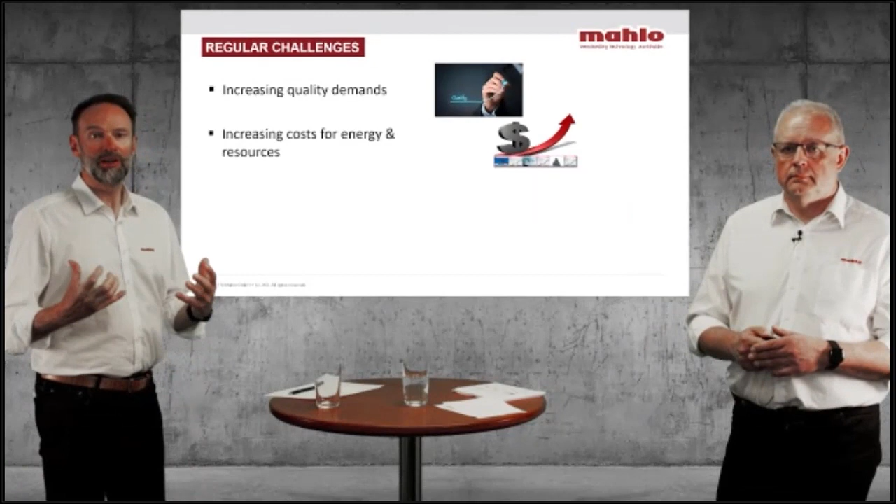Yeah, but no matter if we're talking about textiles or the other industries, we all have the same challenges, and this is quality. Quality is rising, money is always going down. We have to make the best out of it. We really have to get the best efficiency out of it. Nothing goes for free, but we have to provide the best quality.

These are the challenges you are faced with every day, because at the moment, after these unthinkable happenings in Ukraine, for example, and the energy crisis which we all face, also for the future, we are sure that the prices for energy and resources will only know one way, and this is upwards. This is also creating inflation everywhere. In most countries, because of the energy prices, you have a high inflation rate.

This means the salaries also have to go up in order to still be able to buy food and do the necessary things. And at the same time, because there has to be a transition in the world's energy sector and so on, everybody is talking at the moment about sustainability, and this is especially for textile companies an important factor which comes up more and more. Everybody wants to be green, very much so. It's not just that we see it everywhere. We are in the focus.

The textile industry is always in the focus of the media because of the pollution, because of the high energy consumption and so on. And this is also something we have to focus on ourselves, because we can save a lot of money, but also because we have a responsibility towards the next generation, and we have to take that seriously. And exactly this is what we want to discuss over the next 45 minutes to an hour with you. This is your path to sustainability, because we believe there is no excuse to waste any money. No.

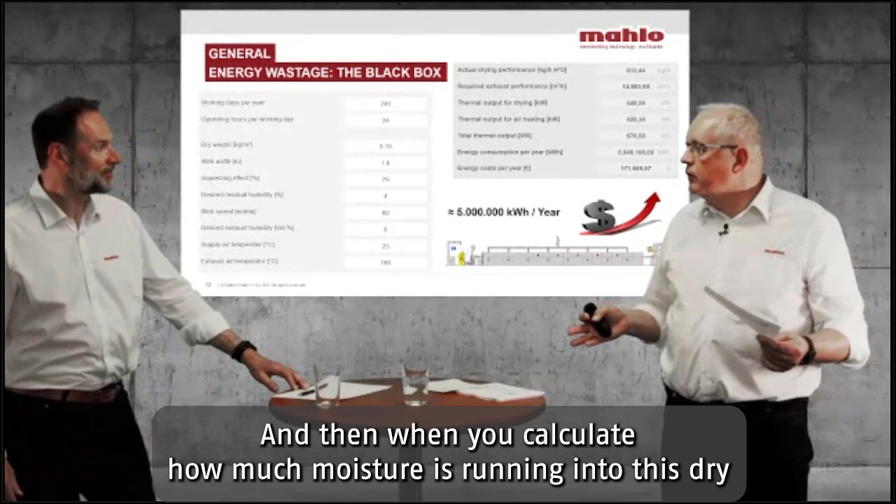When you calculate how much moisture is running into this dryer, you can easily calculate how much energy is necessary to evaporate all this water which this kind of fabric is bringing into the machine. Then we come to a conclusion that around 5 million kilowatt hours per year are used inside such a stenter. This will depend on the product mix and how it is operated, but this is a value which you have per year.

We did indicate the kilowatt hours here because it is very difficult at the moment - the energy prices, we know they go up, but they are still very different, and we think you will have your own values and can calculate by yourself how much money this is.

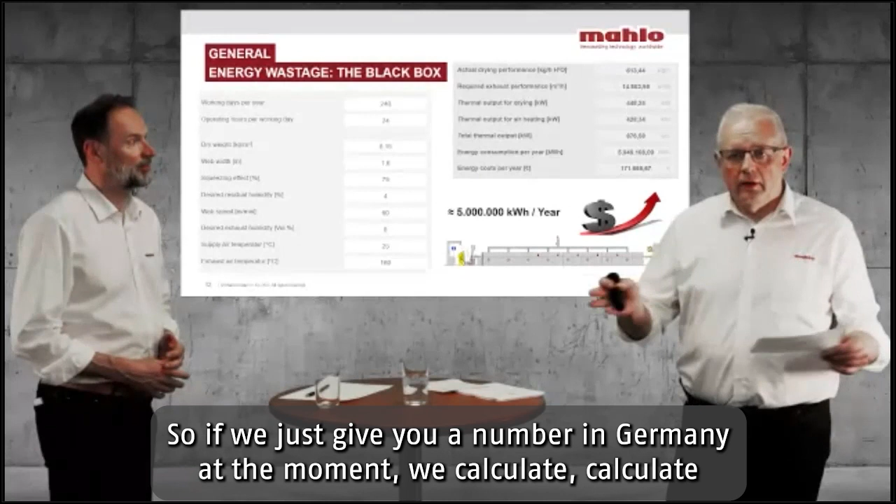If we just give you a number, in Germany at the moment we calculate with 9 cents per kilowatt hour for the industry. This will come to 450,000 euros per year. If you calculate over the next 15-20 years with a certain inflation rate and cost increase, then you can imagine how much energy such a stenter frame is actually requiring through the lifetime, and accordingly the savings you can achieve by optimizing those things are really immense.

And if you want to save money, you don't just look at the energy - there's also the time, the electricity, and that of course summarizes in saving the money. This is called the Mahlo process control.

But it's not just that we - yeah. Okay, sorry.

Since 1945, as we said before, we are actually measuring these processes at Mahlo. So this is something which is really in our DNA - something we have done ever since Mahlo has existed. And so we really have huge experience in this field.

Since we are quite often traveling and meeting our customers, going into the workshops, we are still surprised how few machines are equipped with this kind of sensors that can help you know what is actually going on in the machine and help you optimize the input of resources and energy in such a machine. This is also the reason why we are now talking with you about the process control.

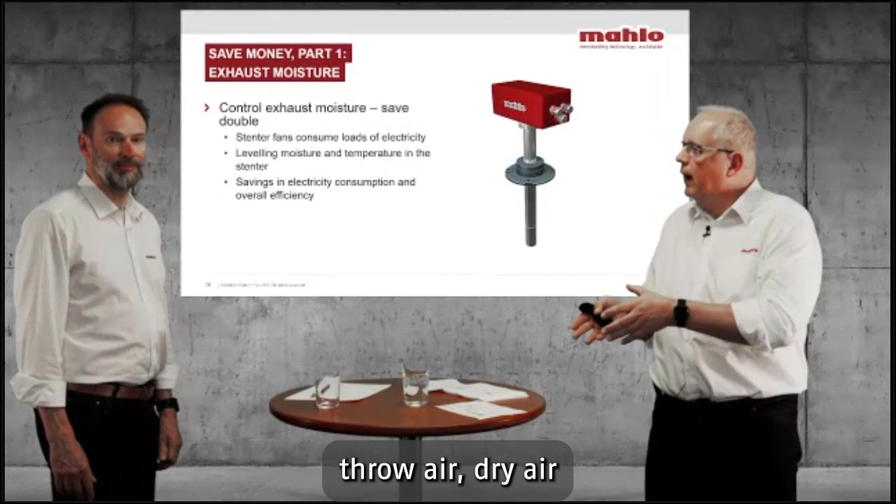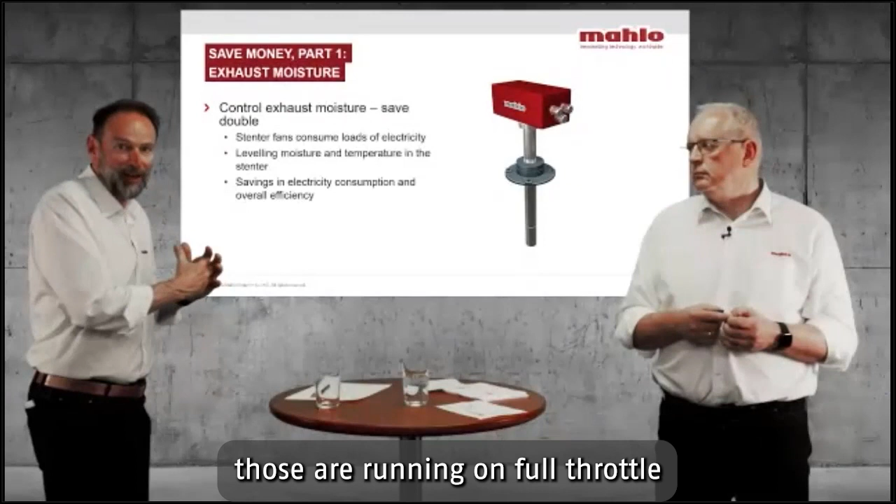Inside the stenter frame, you evaporate the water, and it has to be removed via the exhaust fan and exhaust duct. But very often, people throw dry air out of the dryer which could still carry much more moisture without influencing the drying process. This air is hot, full of energy, and that energy is better used inside than outside the stenter. By putting that air out, you're not just losing hot air that could be used inside, you're also running fans with 7.5 kilowatt motors on full throttle, wasting electricity while pushing out hot air you'd need inside. So you save twice if you optimize that process.

Therefore, we recommend putting the sensor that measures exhaust humidity into the exhaust duct. This is our ZS12, a zirconium oxide based sensor with which we can measure how much moisture is in the exhaust air. Once we know this, we can set a target value that's good for the drying process without influencing the drying itself. The system is then automatically capable of controlling the speed of the exhaust fan, so that only the amount of air actually necessary is thrown out via the exhaust duct.

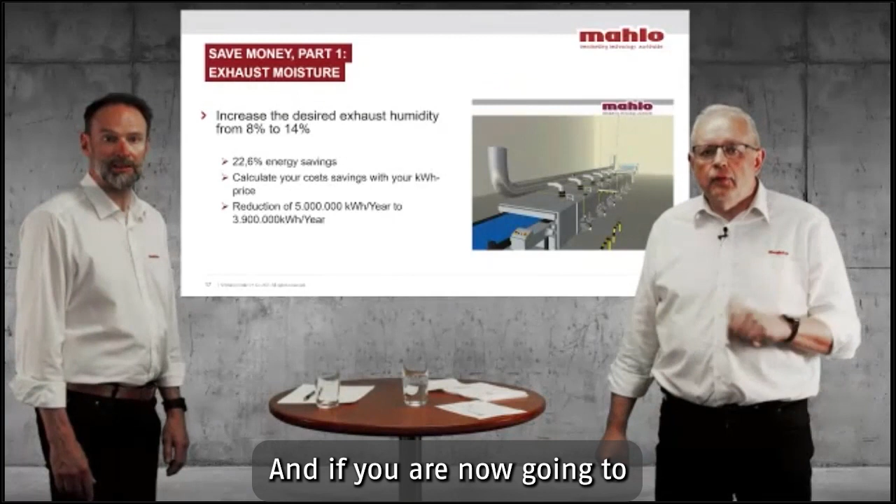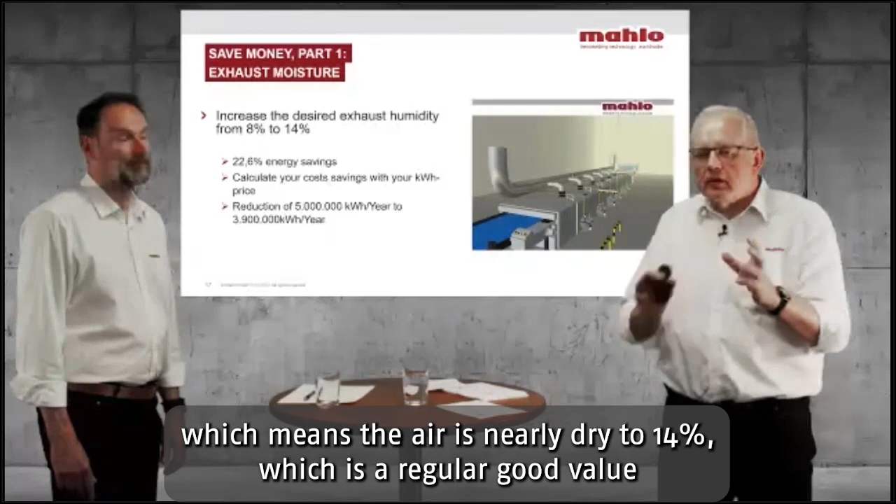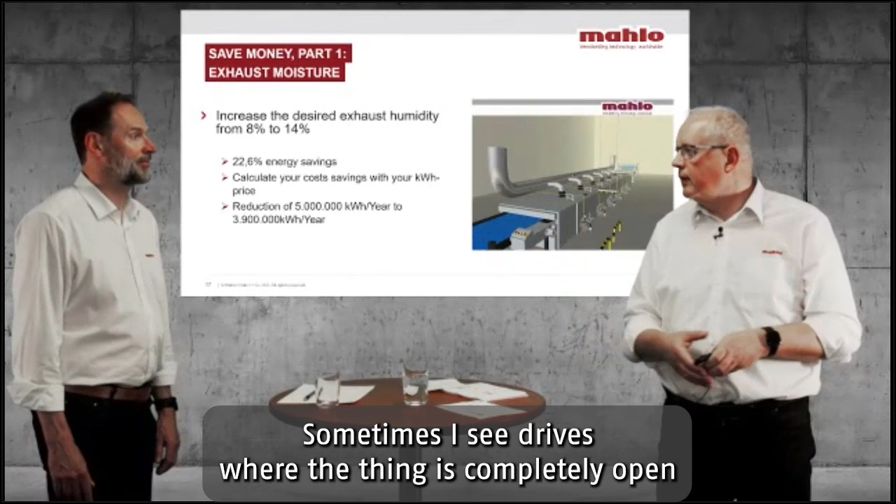If you increase the exhaust humidity setting, for example from 8%, where the air is nearly dry, to 14%, which is a regular good value for most dryers, you can save approximately 22% of energy. And 8% is still on the lower side—sometimes I see dryers where the exhaust is completely open and all the energy is leaving and going out.

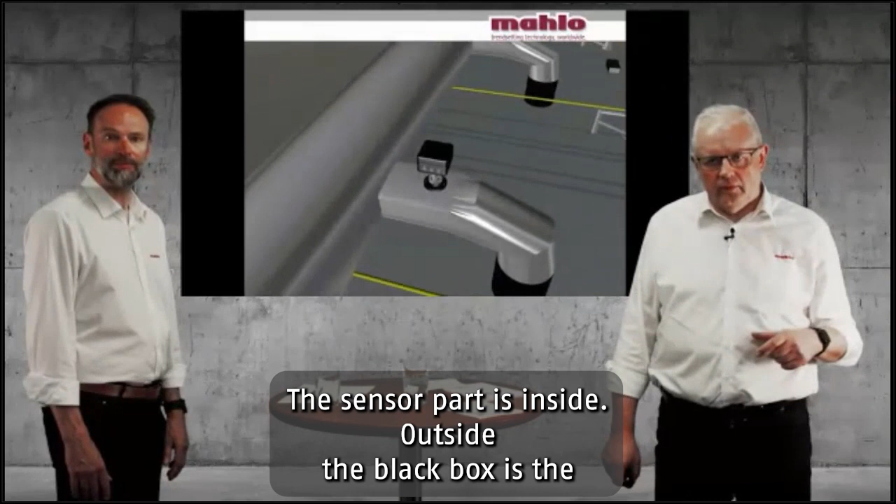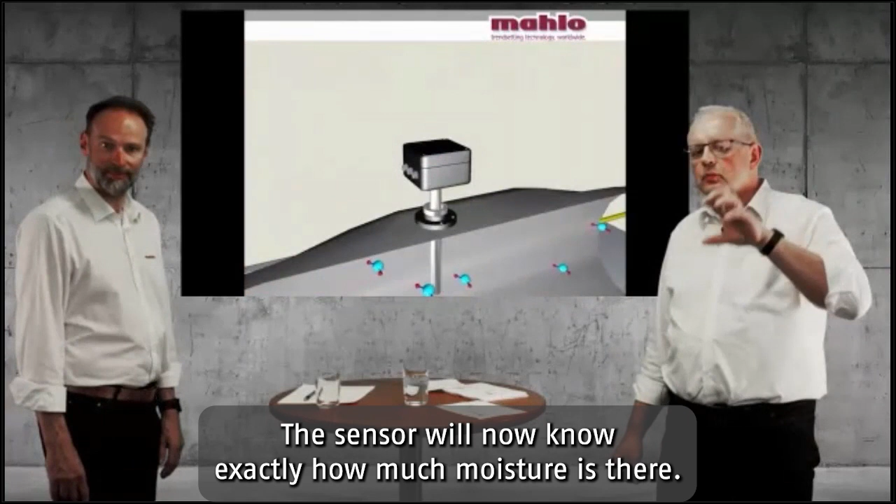Let's go inside the stenter and follow the path of what's happening. So you see the sensor now, it's in the exhaust duct, the sensor part is inside, and outside the black box is the electronics. Here you can see the sensor again. Now that it has stopped rotating, we can see the moisture going into the exhaust duct as it passes by the sensor. The sensor will now know exactly how much moisture is there, and this will be indicated. As mentioned before, with this information we control the exhaust fan.

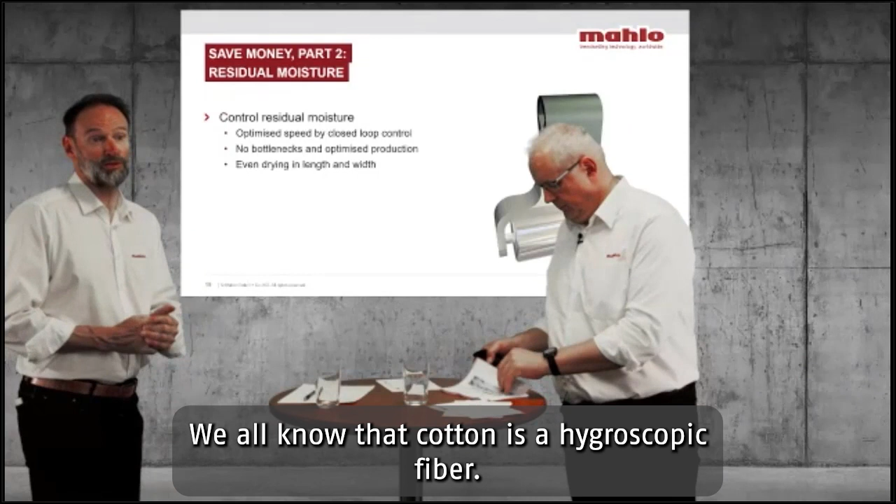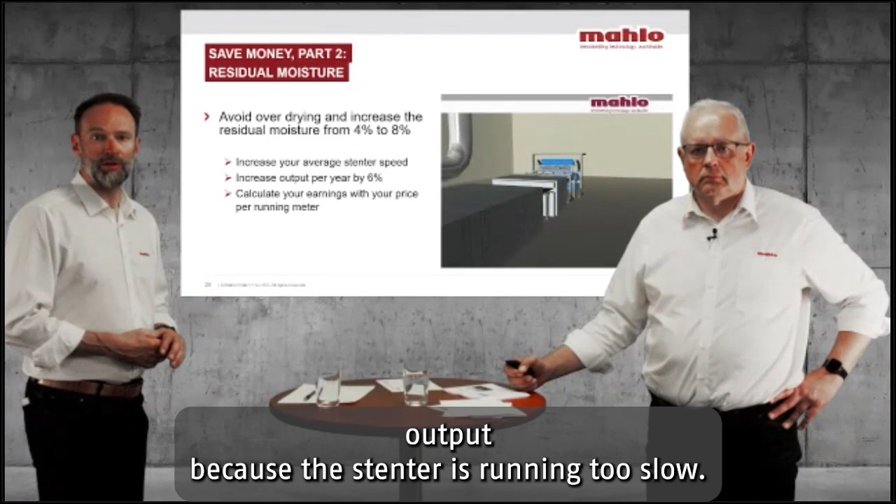Something everybody knows, I think this is also where Mr. Mahlo started, is the residual moisture. We all know that cotton is a hygroscopic fiber. Hygroscopic means it pulls moisture from the surface into the fiber, which means if you over dry a fabric, after a couple of hours you'll have back moisture of more or less 8% in the cotton fiber. With that being said, over drying doesn't help anything—it just wastes a lot of energy and really ruins your overall output, because the stenter runs too slow, you waste too much energy, and the fabric gets back the moisture anyway.

So you have to avoid over drying just to increase the speed of your stenter and get more production out of it. By doing so, you not only get better and higher production, you also get much better absorbency and better fabric quality at the end of the day.

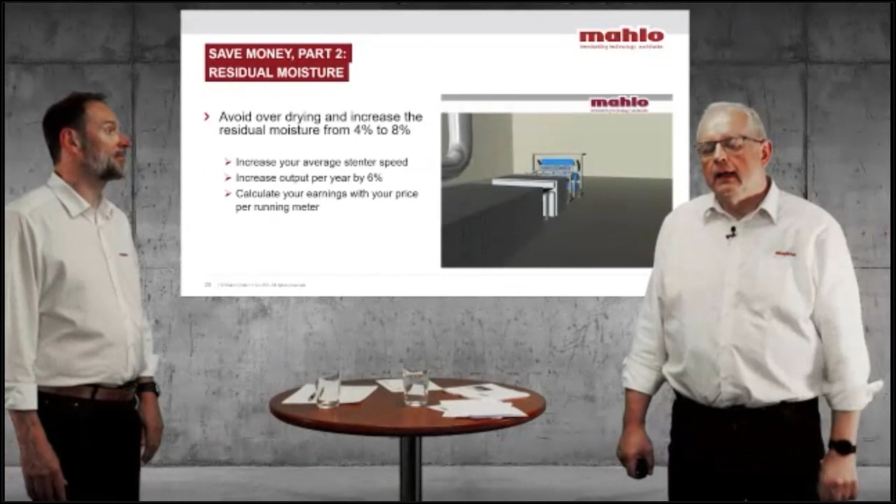Because you can get more output from the stenter frame, you reduce the bottleneck in your production, since you can run the stenter frame at the highest possible efficiency, and you have, as Stefan said, a very even moisture content at the outlet, which is good for the following processes.

We also have a short movie here where you can see the electrodes and how they are installed.

Most of you have seen this, because this is not only on stenters, you also find it on cylinder dryers and weaving preparation machines, wherever moisture content or residual moisture content needs to be measured. This can help optimize the process there.

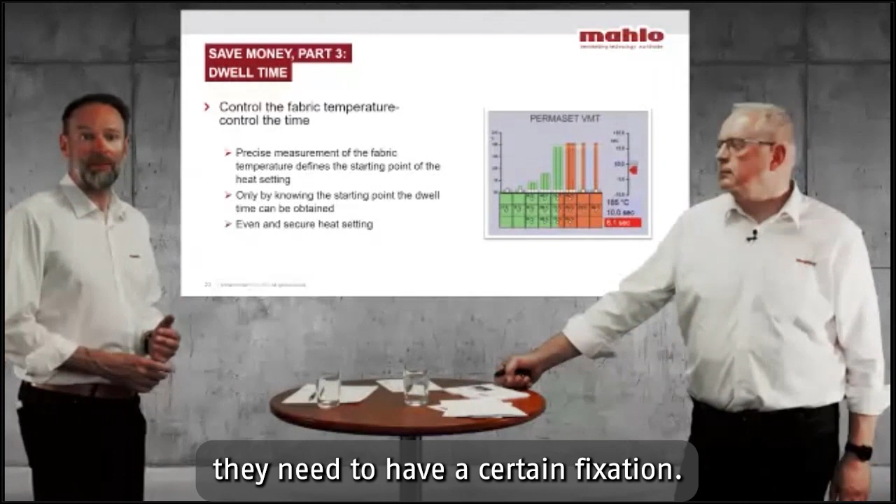Now let's come to part number 3, and this is the dwell time. If we talk about man-made fibers, they need a certain fixation, and this fixation is a clearly defined time period at a clearly defined temperature level. For having a certain time in the stenter, you absolutely have to know where it starts. Otherwise you cannot say when it stops.

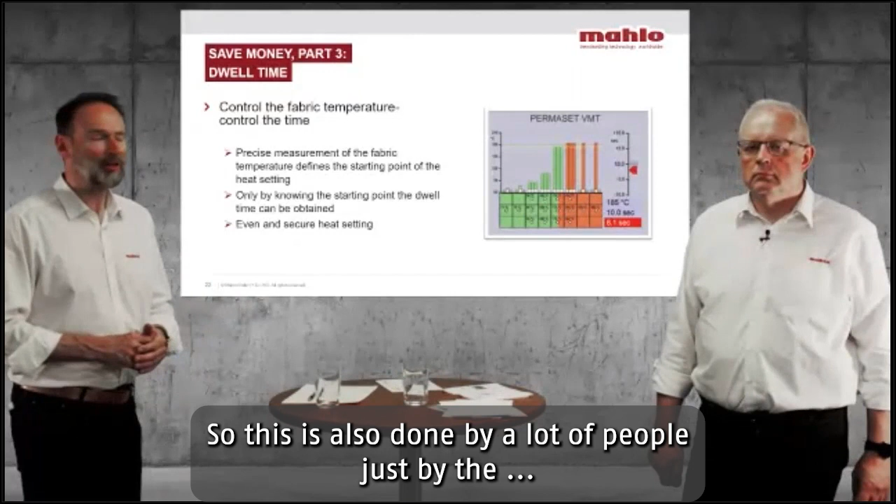So this is often done by people just out of habit, because you do it all the time. Very often I go to customers and ask, and they tell me, well, we run this at 25 meters because we always run it with 25 meters.

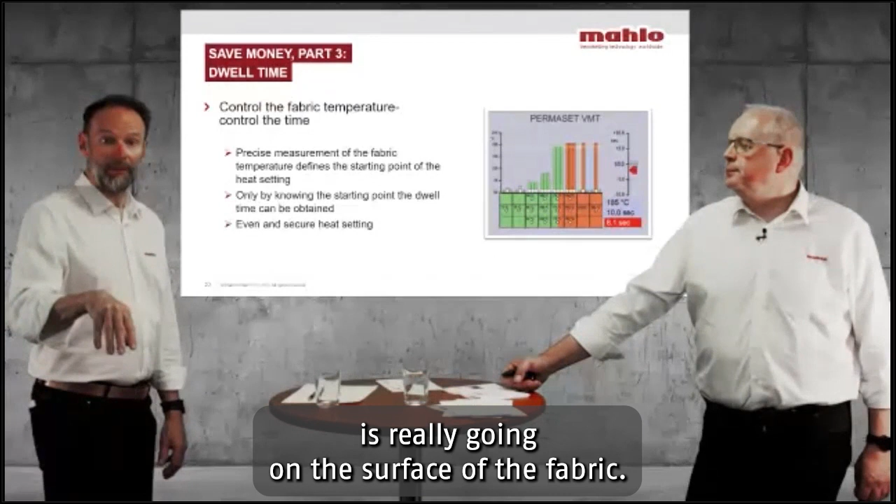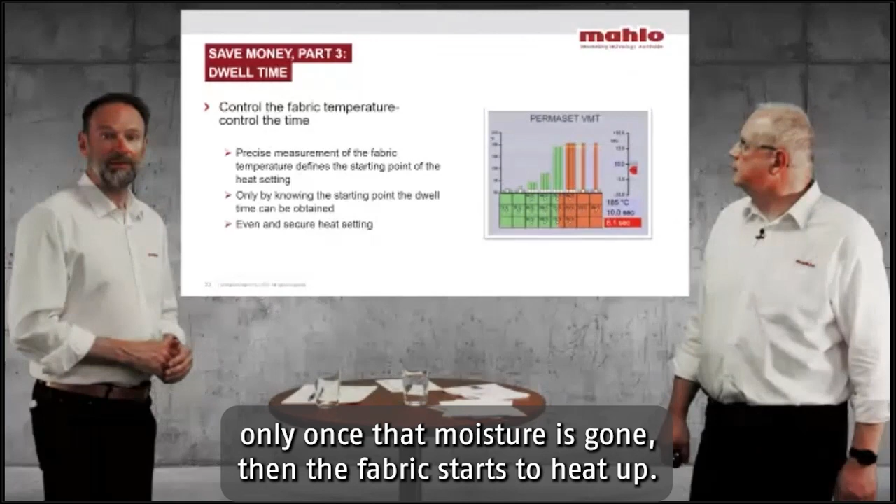Here we have a sensor which measures the temperature of the surface of the fabric. It is not measuring the temperature of the chamber, it is really going on the surface of the fabric and measuring that temperature, simply because at the beginning, when you evaporate the water out of the fabric, that energy is used to get out the moisture, not to heat up the fabric. Only once that moisture is gone does the fabric start to heat up. This is how you see it on the red columns, and those red columns indicate the point when the heat setting temperature is reached.

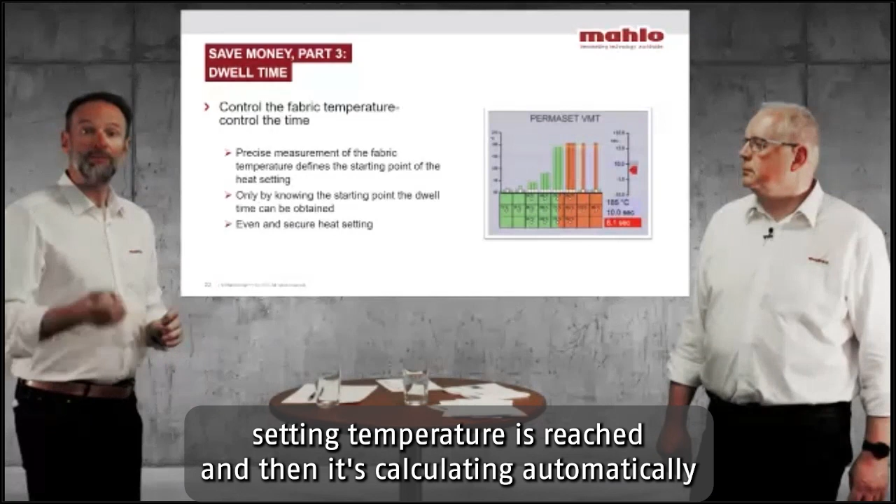And then it calculates automatically the time until the heat setting is finished. So you always have exactly the right speed for that process. Again, you optimize the speed of your stenter and the production of your entire wet finishing. You just have to enter the desired dwell time, which you will for sure know, and off you go.

Then that's the full control done, and with this you can avoid any safety margins. A lot of people run their stenter frame with high safety margins. They do not run it as fast as possible because they want to be on the safe side. But being on the safe side sometimes is also not very good for the touch, for the handle of the material.

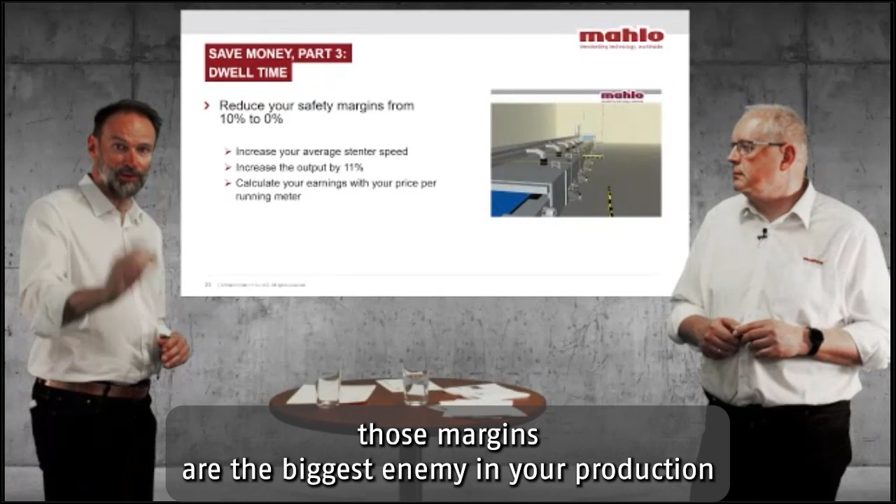Let me tell you something about safety margins in general. Those safety margins are the biggest enemy in your production, simply because they have such a friendly touch. You think, okay, I'm running a little too slow, so nobody's going to blame me. But those safety margins are stealing so much money, so much production out of your process without you even knowing it.

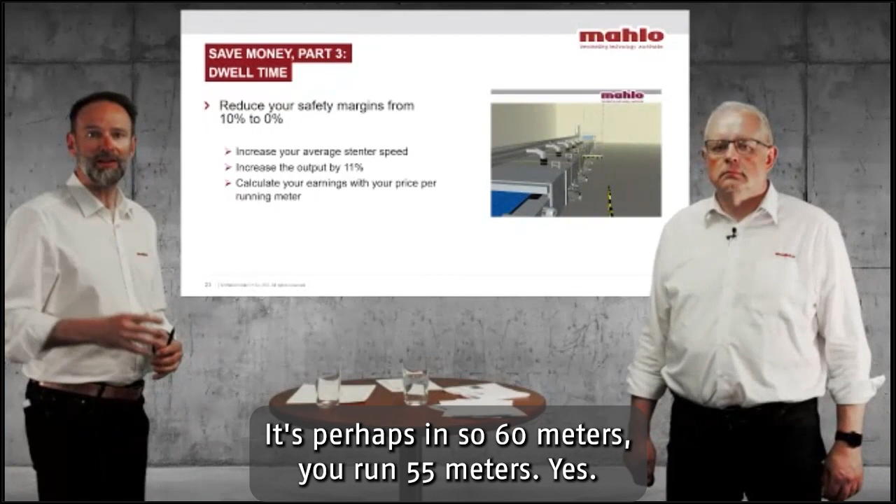With that safety margin, it's not much - perhaps instead of 60 meters, you run 55 meters a minute. But that's 10% less production that you are getting out of the entire wet finishing. And this, gentlemen and ladies, is a huge number, really something you cannot leave unconsidered.

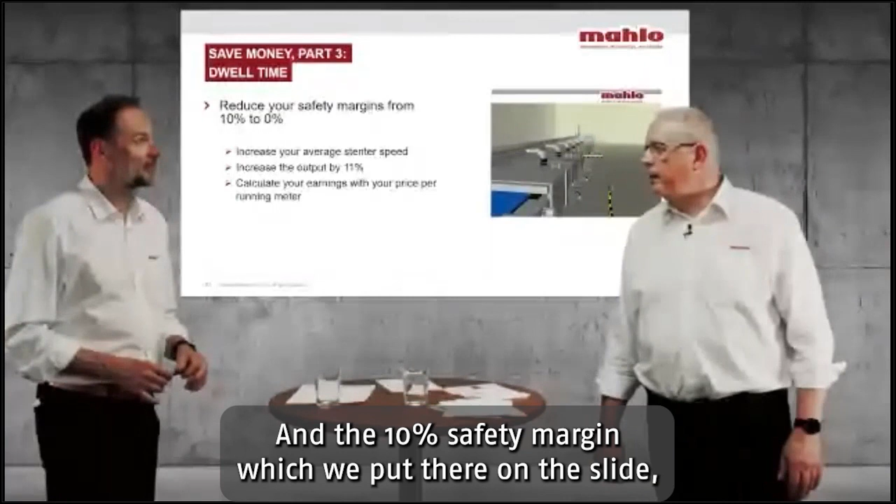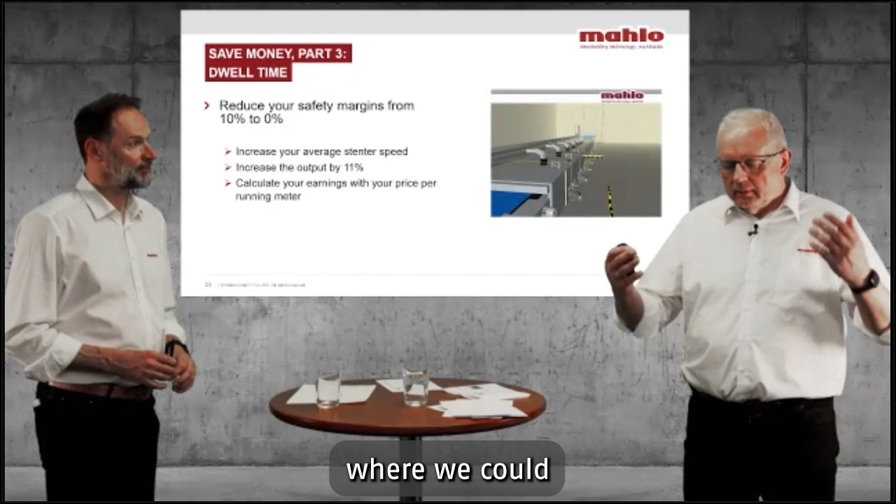And the 10% safety margin we put on the slide is really on the low end. I have seen much more possibilities where we could increase speeds by about 20 to 25%. This is possible, and then you get a quite good output. This, when you have a higher output, also has a very good effect on the energy cost per running meter.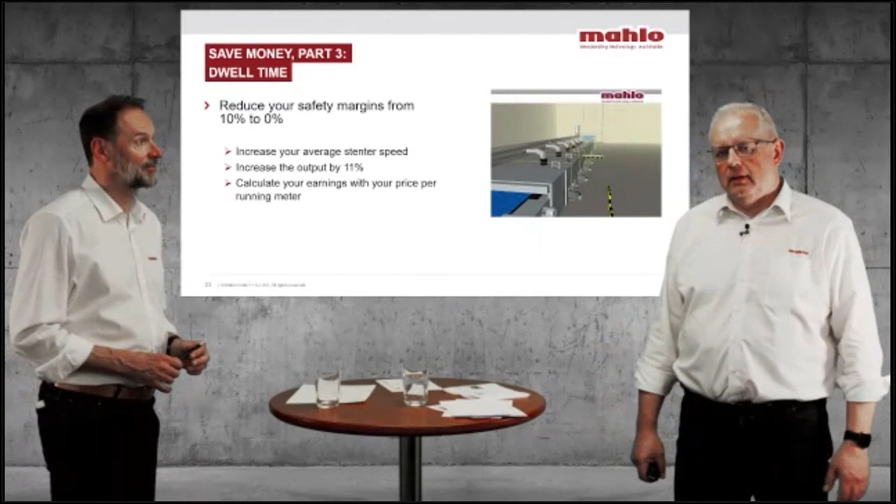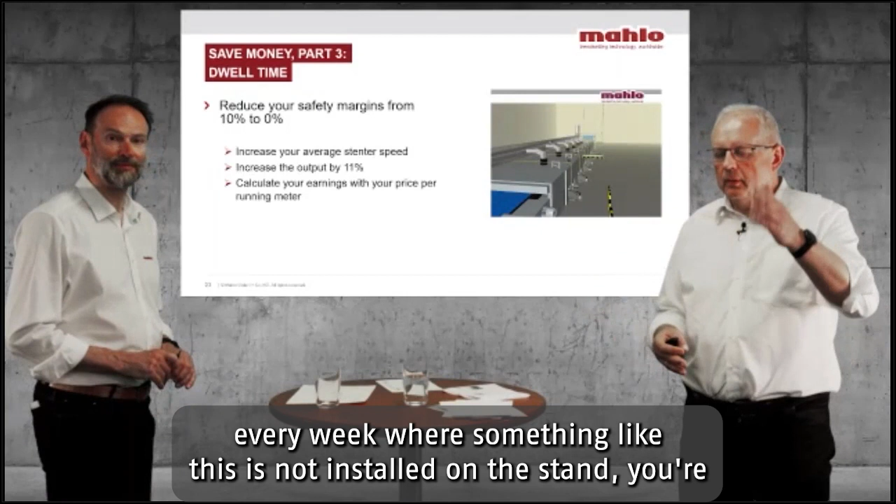In the end, as we said before, there is no excuse not to do this, because wherever heat setting is going on, you need to do it in the end. I don't understand people sometimes when they say let's wait, because there are some costs involved to install such a system - because every week where something like this is not installed on the stenter, you're losing money.

Let's go into the popcorn mode once again for the next movie. Here we see again the inside of the stenter, and you see where the sensors are pointing onto the fabric, giving information to the speed sensor of the stenter, which will always run in a way that your dwell time, your heat setting time, is reached. Here you see it exactly with that small diagram we showed before, where you have exactly the right time when the heat setting process is starting.

That's now the next point. Let's interrupt quickly - we've talked about energy savings now for a long time.

I would be very curious about the situation in your production. Do you have anybody who is responsible for energy saving, something like an energy saving officer, an ESO, in your company? Do you know something like that? So please give us a yes or a no.

Yeah, we just started this inquiry. So, very simple question: do you have such an energy saving officer, yes or no?

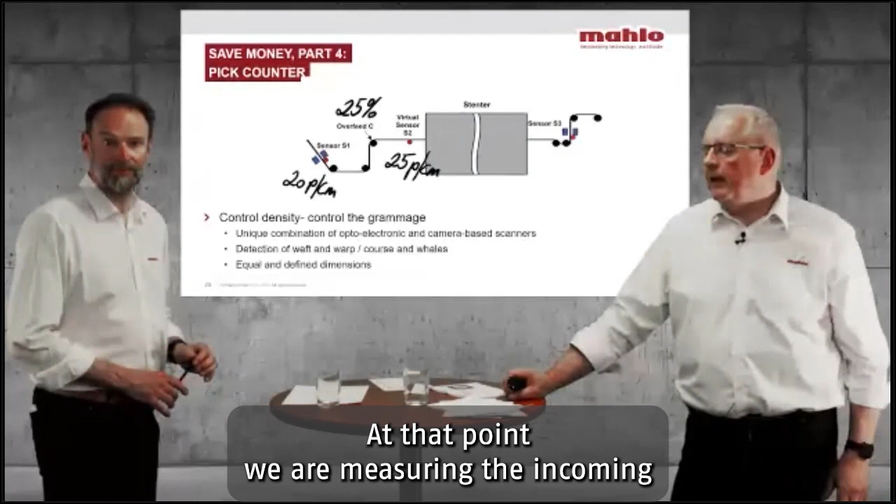And how do we now overcome this? We overcome this with our sensor. This is an optical sensor which is installed at the entrance before the overfeed roller. At that point, we measure the incoming linear density, meaning the courses per inch or the picks per centimeter.

Then, in this case, we have an overfeed of about 25%. You go onto the stenter frame at the stenter entrance, you overstretch the fabric and overfeed the material with 25%, and then you can reach 25 picks per centimeter, or better expressed in courses per inch. Normally this all runs quite fine if we assume that the initial linear density is always staying the same. But exactly,

this is what you mentioned before - it is not always the same. Sometimes we have an entanglement, sometimes a different machine which is stretching a little bit more, and then instead of 20, you all of a sudden have just 18.

And when you now measure with our sensor at the entrance of the stenter frame 18 picks. Let's say it develops, or there's a piece and the next piece comes with 18 courses per inch, and you run the stenter frame constantly with 25% overfeed, then you can calculate by yourself. You will not end up with 25 picks or courses per inch, what you want, but you end up with 22.5 courses per inch.

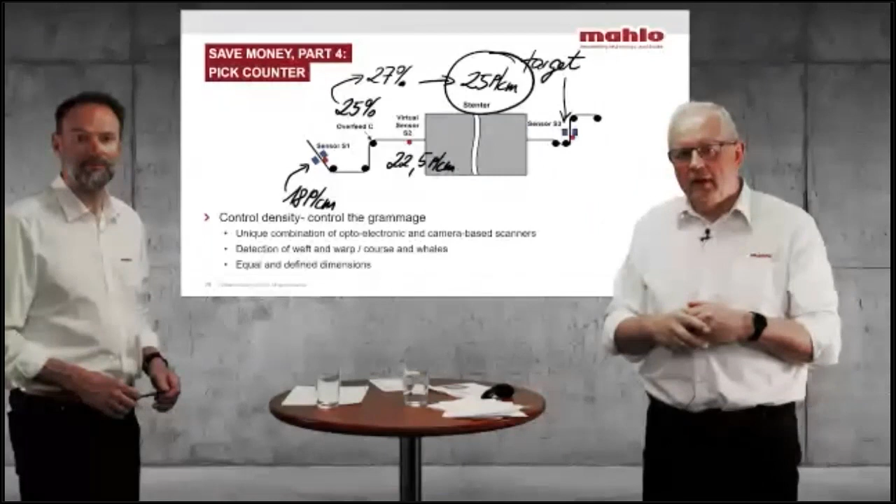And this is exactly then our task, because we will then send out controls to the overfeeding system of the stenter frame and increase the overfeed to 27% until we have again these 25 courses per inch or picks per centimeter. And with this kind of control, this intelligent feed-forward control, we have then the possibility already at the entrance of the stenter frame to ensure that what goes into the stenter frame is completely equal.

So long story cut short, if you have a pick counter from Mahlo, you really have peace of mind that you always have the right density of your fabric, no matter what happened with it before. And this helps inside the dryer again when you have a heat setting and you have a material coming in with a constant density, constant weight. You will not have to do a lot of control up and down.

The same for the residual moisture. It helps for the residual moisture. Even for the exhaust humidity control, you will have a more stable output and also drying process inside the stenter frame. And therefore, we put this pick counter also in there because from our point of view, it's very important, especially when we talk about sustainability and saving costs. We believe that this is a big possibility.

And I have to say, over the last 10 years, we have sold more than 1,800 of those systems to the industry, and most of them were retrofitted also. But this is not the only advantage that you have with such a tool. Density and weight, they are going side by side, and we all know that knitted goods are sold by weight. So the weight plays a major role, and we have now the ability with our camera-based sensors at the exit to also get an indication about the weight directly after the stenter without putting the samples to the lab.

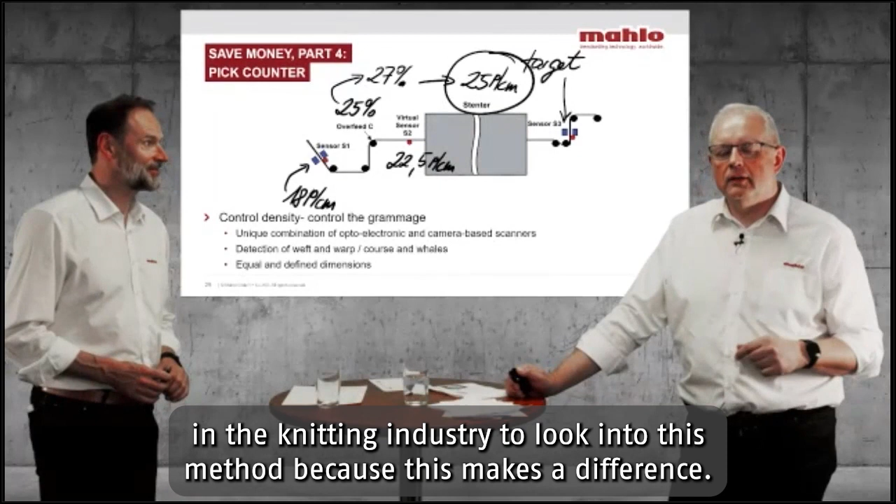Okay, so this is what we can provide as well. This is part of this pick counter package on top of it. Now I only can recommend all the companies today online who are active in the knitting industry to look into this method, because this makes a difference. It really does. Okay. So coming to another one, cylinder dryer.

Whenever you see cylinder dryers, you see a lot of steam, and if you have a stack of cylinders where there's no steam coming out, then you know exactly there's a problem. The cylinder dryers are mainly designed according to the potential of the continuous line, and continuous lines are designed according to one speed only, because the time for the washing and bleaching and so on is defined on the different compartments, and therefore also the cylinder dryers are defined for the highest weight and the highest speed, so they cannot be controlled in many ways.

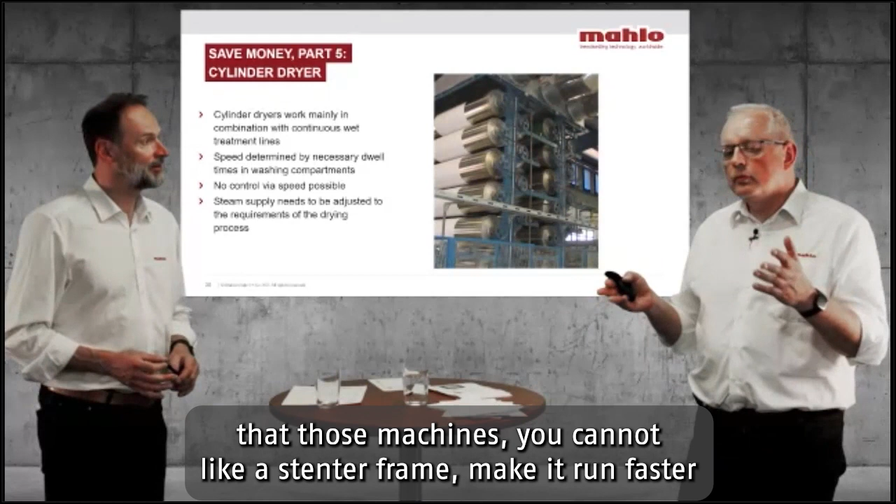So it's very important to know that those machines you cannot, like a stenter frame, make run faster or slower in order to control the residual moisture content with it. The only choice you have here is to control the input of steam into the cylinders of the dryer, in particular if you have a very, very light fabric which is running over the entire stacks. And this is what we do. We have the ability to switch on and switch off different stacks or even different cylinders to optimize the steam consumption for two reasons.

First of all, steam consumption, of course, again, is energy. It's money. But on the other side, and this is even more important, you have a good absorbency afterwards, because if you have a fluctuation in the drying process, then of course you have a difference in the absorbency. If you just imagine you have an over-dried fabric at one stage with perhaps 2% or 4% residual moisture, and then again you have 8%, that is already a delta of 50%. In the next process, where you perhaps have chemicals added, a lot of chemicals are used at that step just because you had a problem with the cylinder dryer.

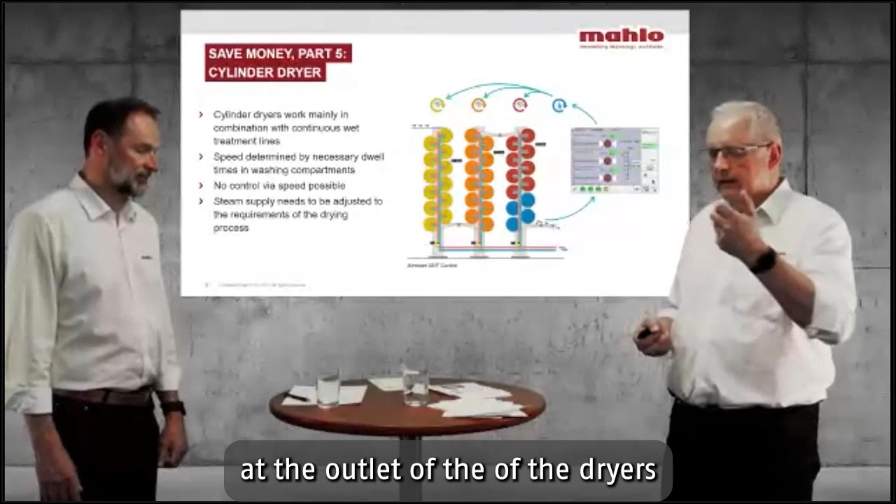And now a few words about our system. How does it control the steam supply into the individual cylinders? At first, we need to know how much energy is required. How can we get this information? We have decided that we are measuring the temperature of the condensate at the outlet of the dryers, because with the condensate temperature, you know exactly whether there is steam input required or whether there is enough steam still inside the material.

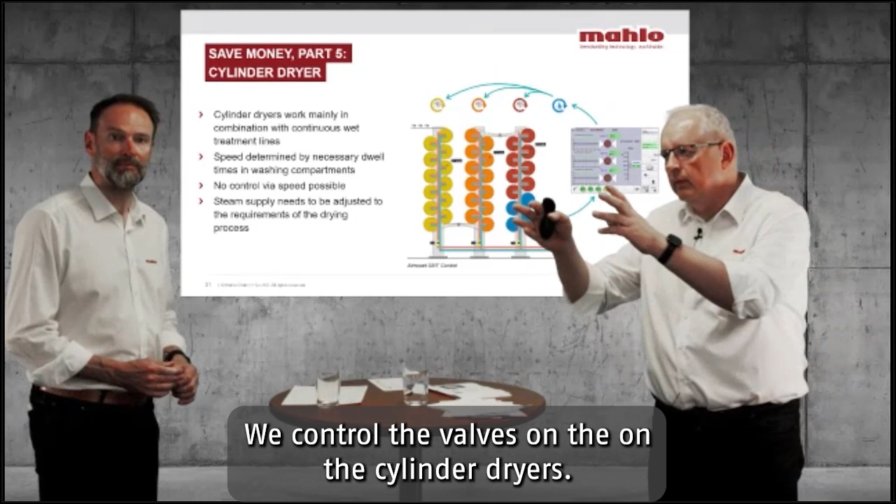So if, for example, you're running a lighter weight fabric and a heavier weight fabric comes onto the first stack, immediately you will see that the condensate temperature will drop down. And this is then the moment where we control the proportional valves on the cylinder dryers, and with this we keep the condensate temperature always stable.

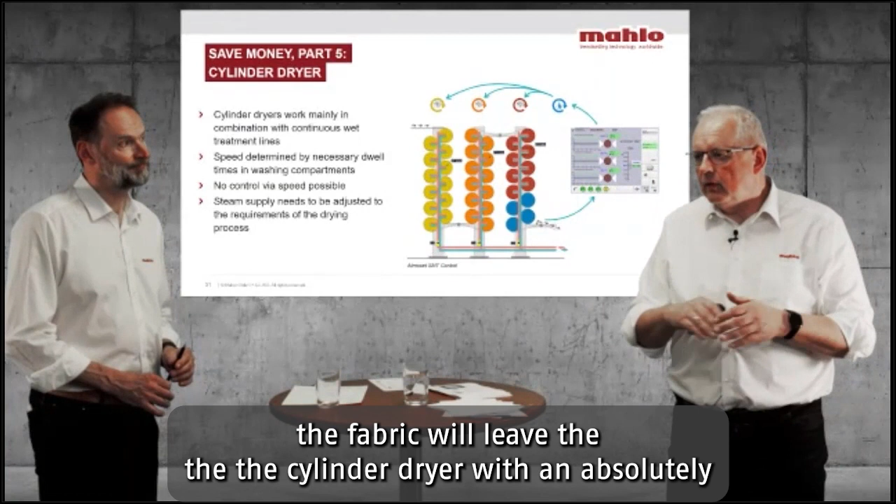At the end of the dryer, we additionally have a residual moisture sensor, and with this moisture sensor we will bring the absolute flat line to the right level, whether we require 6%, 8%, or 10%, depending on the fiber type and the process afterwards. With this kind of system, we can ensure that, like what Stefan said before, the fabric will leave the cylinder dryer with an absolutely homogeneous moisture content in length direction.

So listing and tailing in following dyeing processes will be much reduced, and this is also what a lot of our customers told us. Energy saving is very interesting for them, but also the improved quality within the following processes. Every padding coming afterwards is consuming so much more chemicals and dye stuff if you don't have a level and optimized residual moisture at the cylinder dryers, and this is costing much more money than the steam, because this is highly concentrated chemicals.

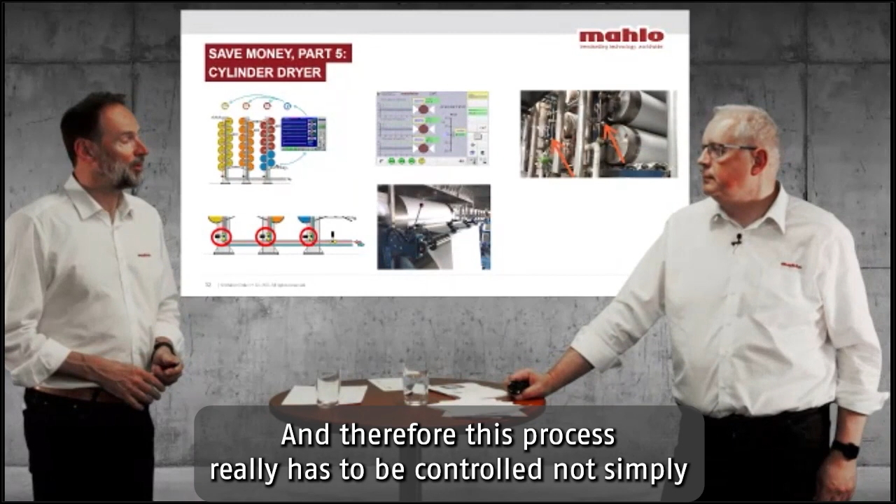This is really dye stuff which costs a lot of money, and therefore this process really has to be controlled, not simply because of the steam. We are talking about 36% which can be saved here, but the following costs really count, and that also has to be looked after.

Here you have a few impressions of how the systems look when they are installed. Because of time reasons, I don't think we have to go through all this. And here is a summary of what we already mentioned. One important thing is this one value, up to 36% savings of steam input, or energy savings.

And these are values which are not from us. These are values from our customers who noted and stored the data about the steam input into the system before and after the installation. It depends always a little bit on the product mix how much you can save, but it was up to 36% on several qualities. They have a calculation before Atmoset and after Atmoset, and after Atmoset is normally 36% less steam than before. The other points on this slide, I think we have mentioned already when we explained the system.

Let's jump into the main part. So we can now start with the residual distortions and weft straightening itself. We have put this also into the context of energy savings, because the cheapest energy is the energy which is not used in the end. And weft straightening is one of those topics.

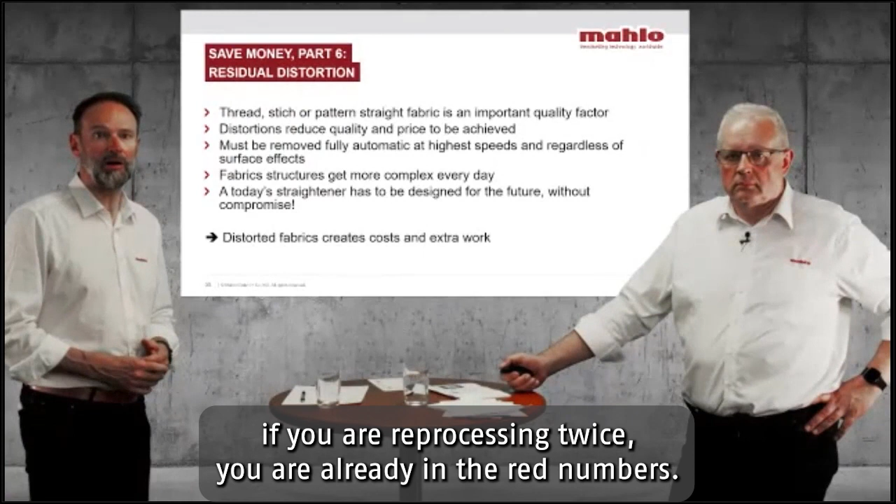You need to supply straight fabric to your buyers. If you can't do it, and you recognize that there are still distortions in, you will have to go back, and this is creating a lot of costs. If you reprocess once, the entire margin is lost already for that batch. If you are reprocessing twice, you are already in the red numbers. So from the economical point of view, this is a very important factor, that you don't have to cross a stenter twice.

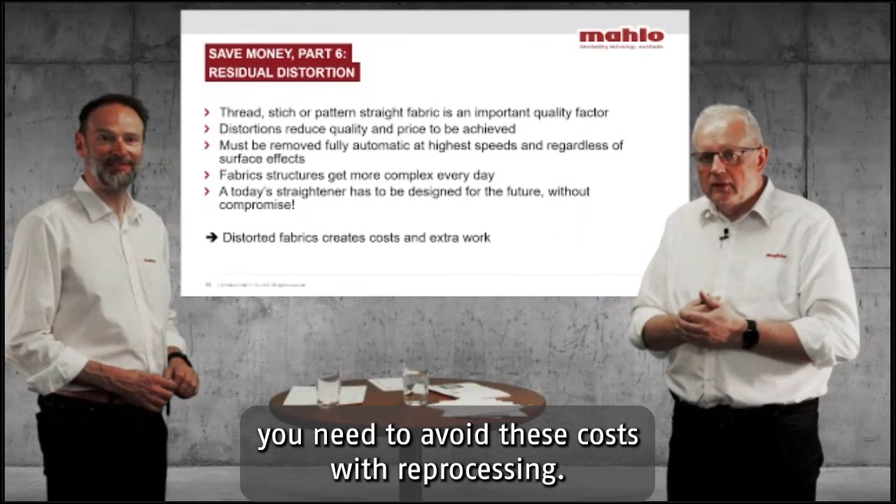Exactly. And when we talk about weft straightening machines, we believe that a weft straightener does not have to be designed only for the products you have at the moment, because we are in a fashion business. Therefore a weft straightener has to be designed for the future, so that you are safe, because in the future you also need to avoid these costs of reprocessing. We talked with our customers and asked, what are they doing when they have this kind of problem, when they realize some distortions?

Some of them, and this is the majority, say they will run it a second time through the stenter frame, and there they have to dip it. They have to wet it to get it corrected, and then they go through the stenter frame. It's a waste of money.

Another possibility would be to accept a lower price for quite a big portion of the material, say a B quality, or, as we have mentioned, a total loss. This is where you really cut out those areas where you have these distortions, and in the end, this is where the costs are coming from, from all this reprocessing.

One of the big advantages of Mahlo is that we have a very, very wide range of different units. So we can adapt our model totally according to your needs. And this starts with the sensors. You tell us your product mix. This is something we always need to talk about with our clients. We need to understand what they want to do with such a machine.

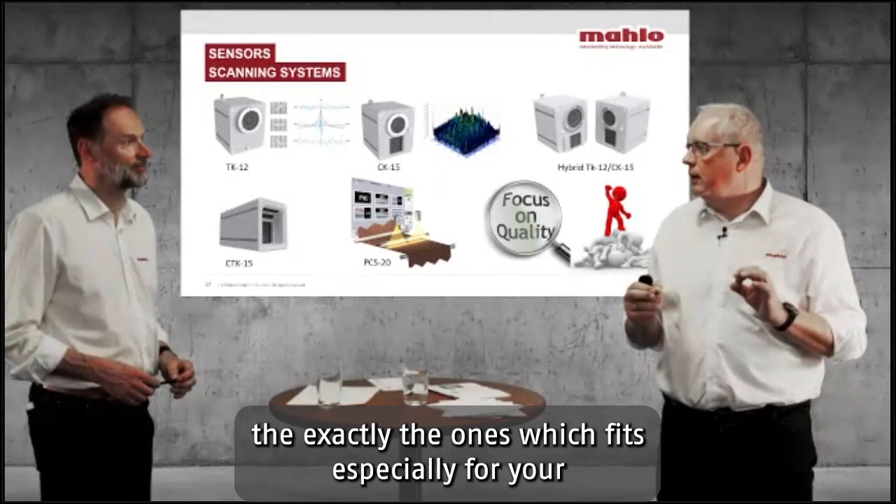And after we understand this, and after we know the product mix and your plans for the future, then we can use our quite big portfolio of different measurement principles to select exactly the ones which fit your needs. We do not have to do everything with a camera. We do not have to do everything with an optoelectronic scanner. We have quite a wide range.

And what we see here, on the left side we have the TK12. This is our optoelectronic sensor, which we consider to be the standard in straightening for the majority of the products. Then we have our CK15. It's a camera-based image scanner, which is available with reflected light, with transmitted light, with enforced light for special qualities.

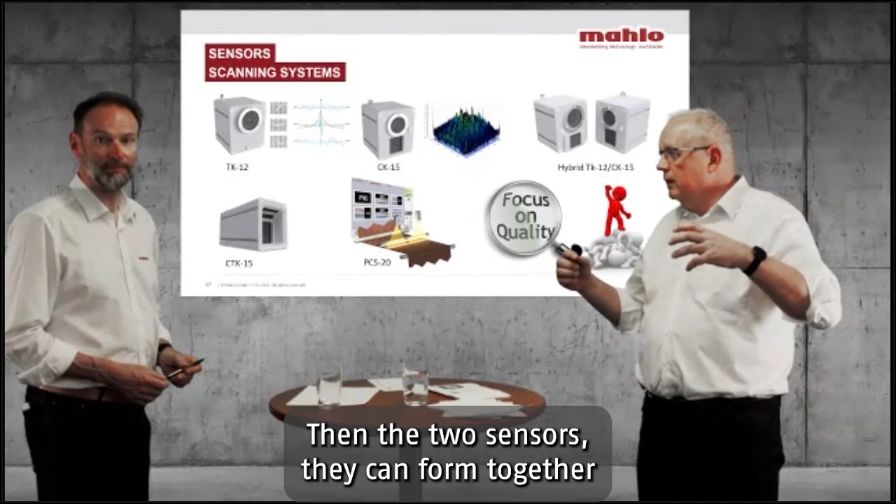Then the two sensors can form together a completely new system, which we call a hybrid system. And then you can use one sensor to check the fabric from one side, and from the other side you can check the others. And with this, you have in the end all possibilities.

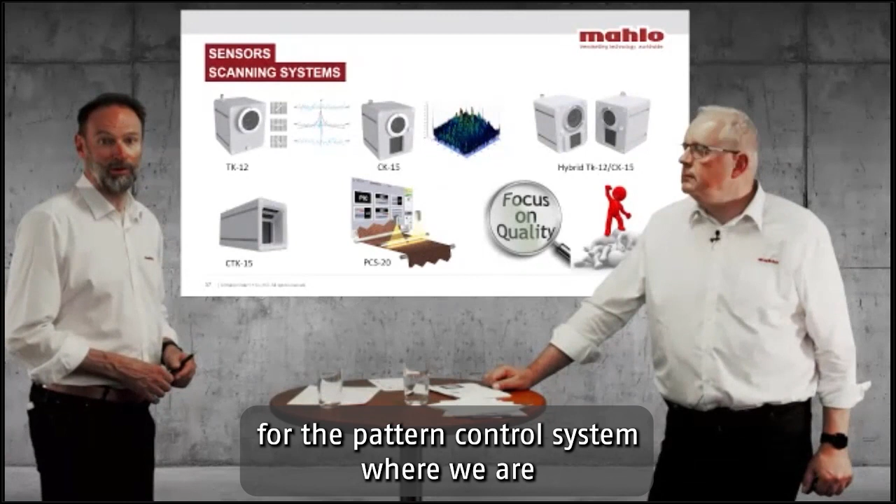Finally, we also have the line scanning for the pattern control system, where we are scanning the surface of the fabric like on a Xerox to detect the patterns. So if not the weft is running the show, but the pattern is ruling, then this PCS line scan camera is the best solution for that. A typical application would be, for example, lace fabric, where you do not have a weft or a course line going from one side to the other. You also use it in shoe production or for airbags in technical textiles. So there are a lot of different things that can be counted.

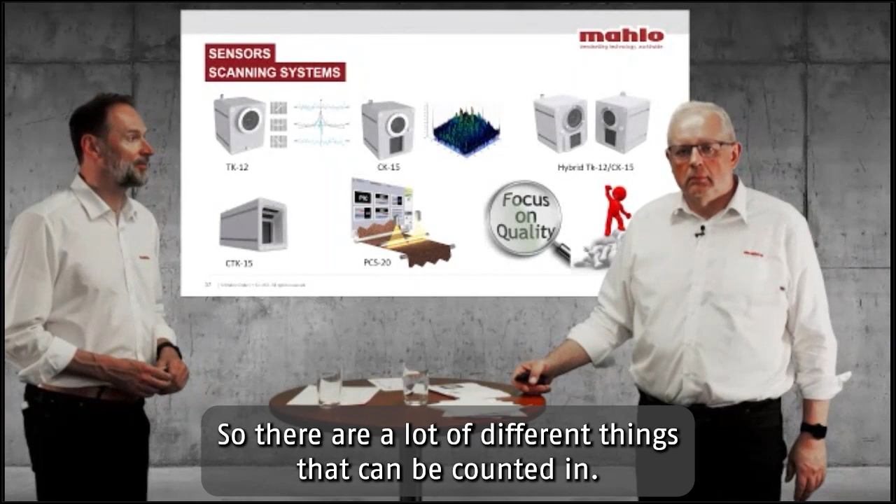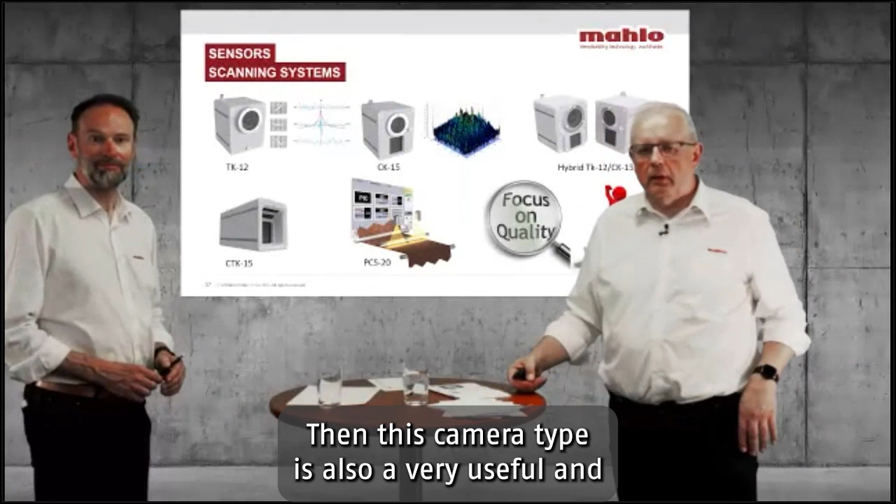And we have one more sensor. This is the CTK15, and this is for when we have very rough structures, like in the carpet industry, tufted or woven carpets, or slow speeds, or very slow speeds. Then this camera type is also very useful. And like we mentioned before, it's not only that we have these different principles, also within each principle we have different executions of our sensors with which we can adapt directly to your needs.

Should we run a little bit, because I think there are still a lot of different things ahead of us. Now this we can maybe skip.

What is also quite important is to understand that we have a very, very unfriendly situation at the dye houses. We have a lot of dust, a lot of dirt, a lot of fluff. So it's a very hostile situation, and therefore any traversing movement of the sensors is not really playing into the cards of the production.

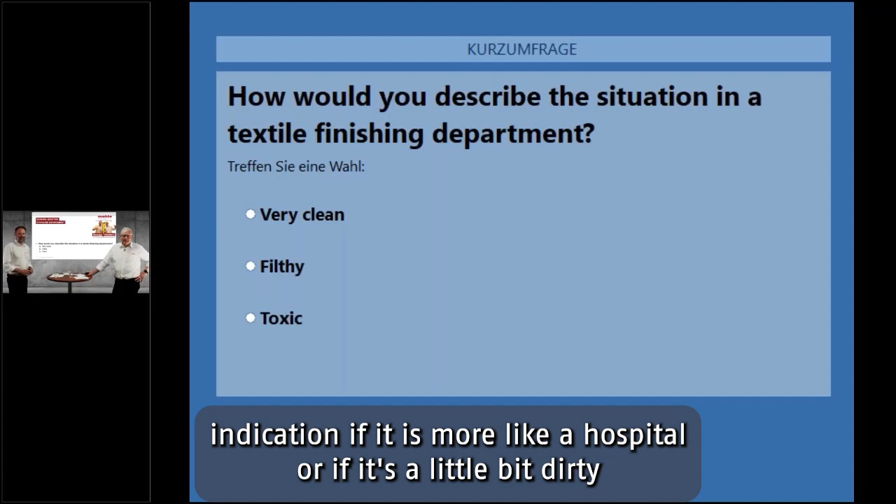How does it look in your production? Can you tell us about the situation? We don't collect the names, but if you could just give us an indication if it is more like a hospital, or if it's a little bit dirty, or if it's really toxic. Just give us your vote right now.

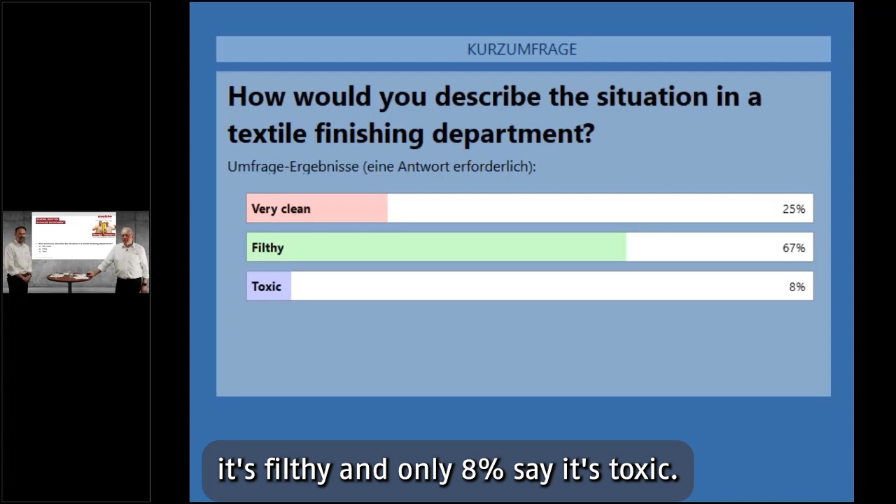I can see the results. So 25% of the participants describe the situation in the finishing department as very clean. 67% say, well, it's filthy, and only 8% say it's toxic. So what about your experience?

Good, but that shows that we really have to take all possible precautions to make sure that a sensor is not stuck somewhere and is not giving information anymore. The Mahlo system always has at least 4 sensors sitting side by side, up to 8 sensors, which are constantly counting every single point of the fabric, and even if one sensor is not working, the others are compensating for that. So we really have a very, very safe operation, and this is important because the sensors are the eyes.

Without the eyes we could not see, and without seeing we cannot control, and this is why we don't take any chance here by any moving part. We just make sure that we get the required information, absolutely sure.

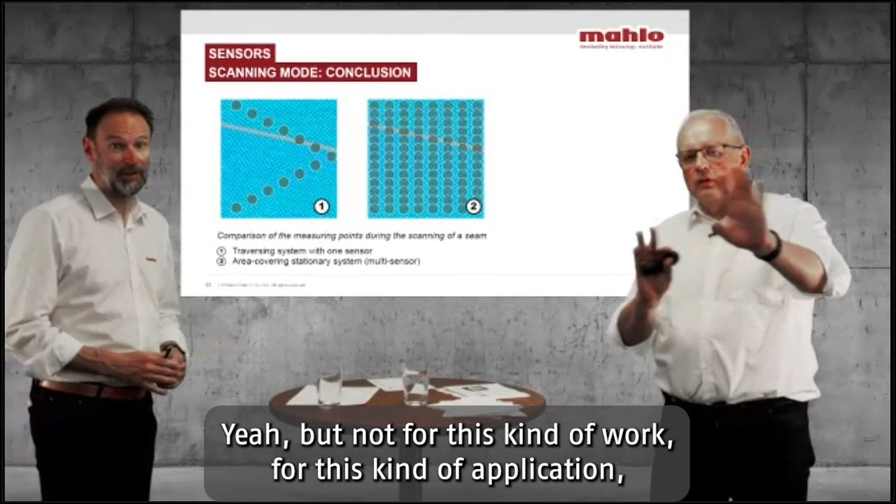Okay, yes, and this was a clear decision within Mahlo also to go this way, to have our sensors at different positions in cross direction, because then every millisecond we get new values. This is constantly renewed. If we would now let one sensor travel, we have that, but not for this kind of application. For this kind of application, a fixed multiple scanning system is much better, because you have this instantly, immediately there.

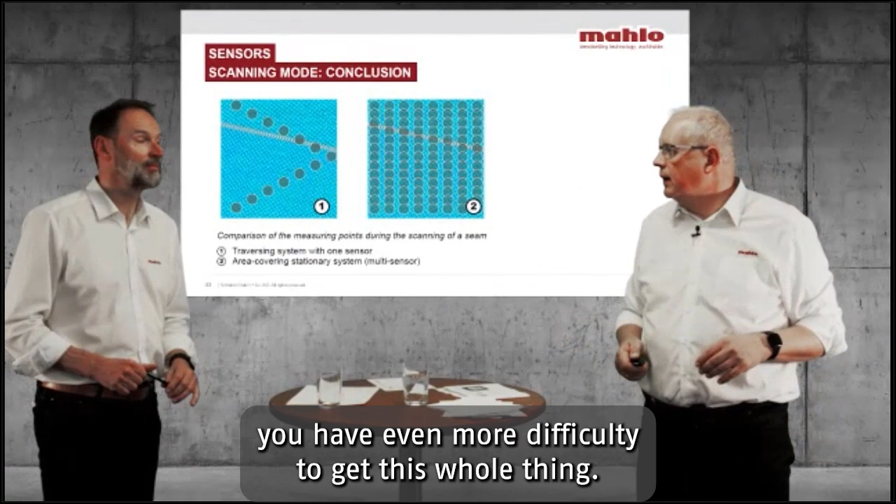If you would have one sensor and it's traversing in cross direction, as you can see on the left side, it takes too long before you actually can react. If there is a bad seam coming through, you have even more difficulty to get this whole thing sorted. Therefore, it was a clear decision from Mahlo to go this way, because it's simply the best.

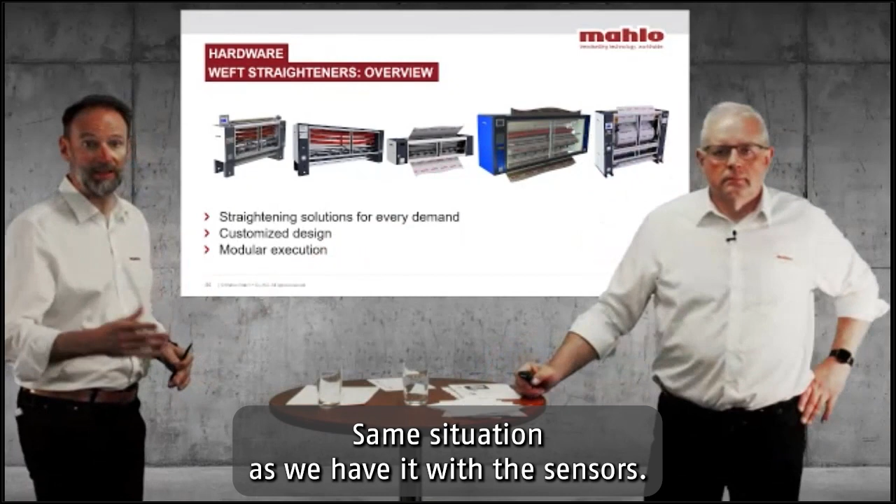Okay, let's go to the hardware. Same situation as we have it with the sensors, we also have it with the machines. We have something for everybody. So no matter if you have commodities, or carpet or denim, or lightweight fabrics, or even some things that cannot be detected, we still can straighten it. We can straighten doglegs, we can straighten S-distortion. So you tell us again what your problem is, and we provide the solution.

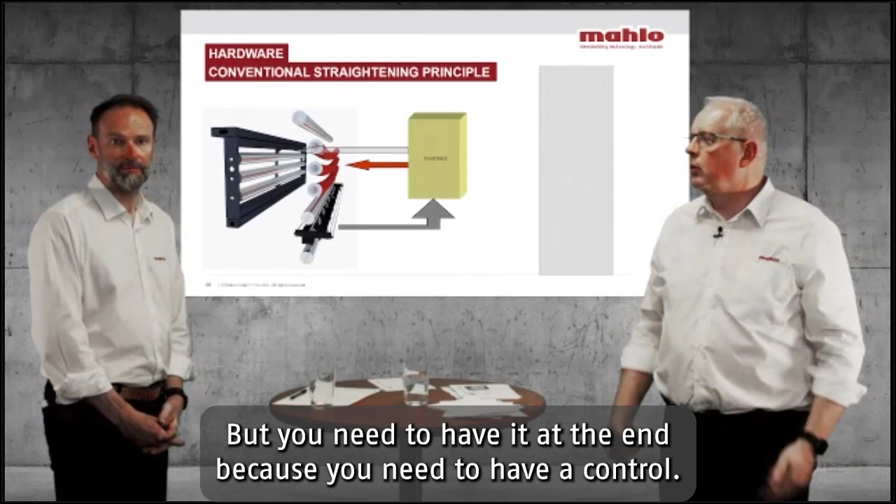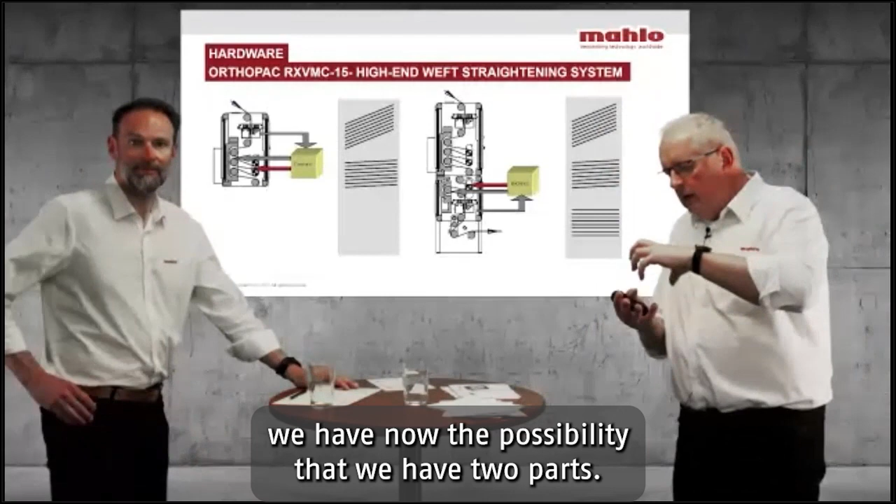But you need to have it at the end because you need to have a control loop. You cannot just put it on the top of this machine, and therefore you always need this at the end. But with the new machine, what we call the Orthopac RXVMC-15, we now have the possibility to have two parts. We have one straightener, on the left side you can see it. It has the detection system at the entrance.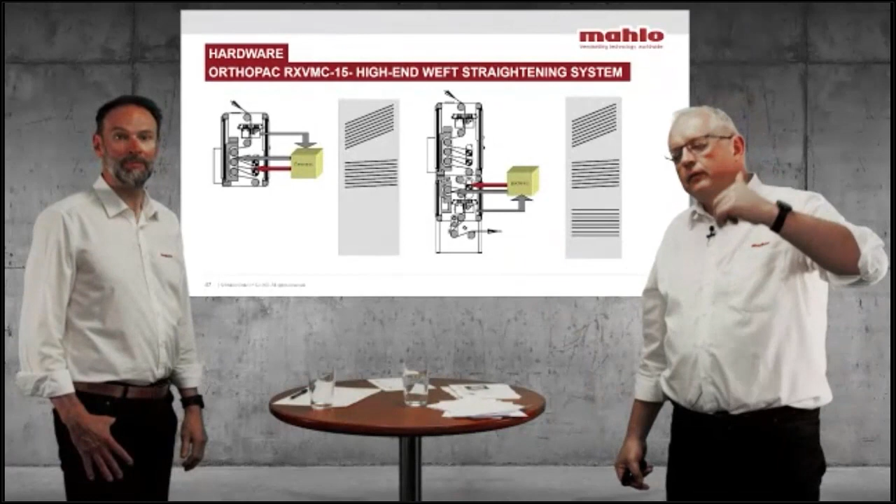As soon as the material is coming in, we can see the distortions, and based on the distortion which we see, we immediately can start from the first centimeter of the fabric arriving there, or of the new distortion. We can move the skew rollers and react on this. For sure, this is not a controlled loop. Therefore, on the other side, we have a second part of the weft straightener, and there you can see there is also a skew and a bow roller and a detection system at the end.

So this fine-tuning straightener afterwards will recognize any distortion which might still be in the fabric and give a signal via the electronic systems to the skew and the bow roller, and then you can be sure that the fabric is completely straightened right from the beginning. It's actually two weft straighteners in one.

This machine is equipped with our hydraulic system to move the skew and bow rollers to the right positions. This is an excellent system, working in a linear fashion because the piston moves the skew rollers directly. The momentum is unmatched—no other system can create that momentum like a hydraulic system. You use hydraulic systems with caterpillars or cranes or heavy duty operations, and this is why this momentum is really without competition.

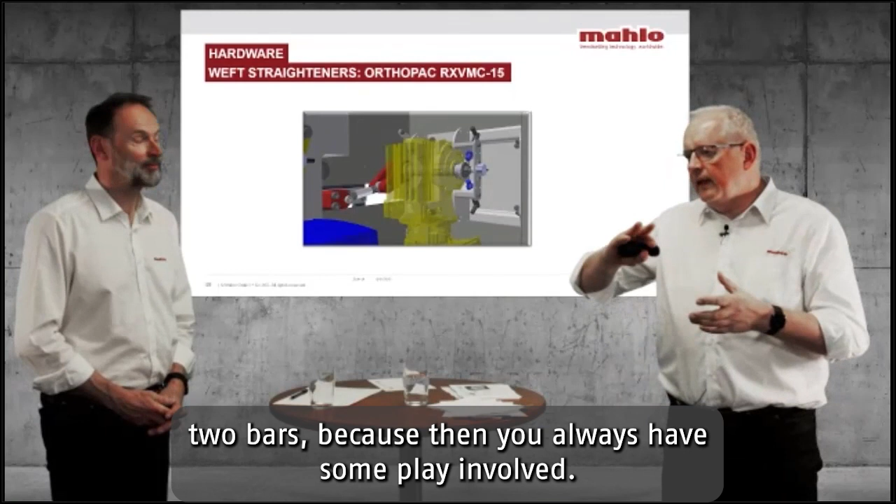We also give our customers the choice of an electric system, and there too we have optimized the kinematics of the drive so that its characteristics are very close to the hydraulic—not as good, but close. It's much better than if you just have toothed bars, because then you always have some play involved. Here, with our system, there is no play involved.

A Weft straightener constantly has to move forward and backwards—it's a constant job, a lot of work. This is very important as well, because here we worked together with a university in Germany on an algorithm which takes the history of the fabric and calculates the development of that distortion into the future.

Yes, we can look into the future and predict how that distortion will develop. With that knowledge, we don't have to move so far—we don't have to make as many movements if we already know how the distortion will develop. This gives us a clear competitive edge because we are simply faster. If you know exactly what is happening up front, you can act up front and take the exact amount of movement and force to eliminate that distortion in time.

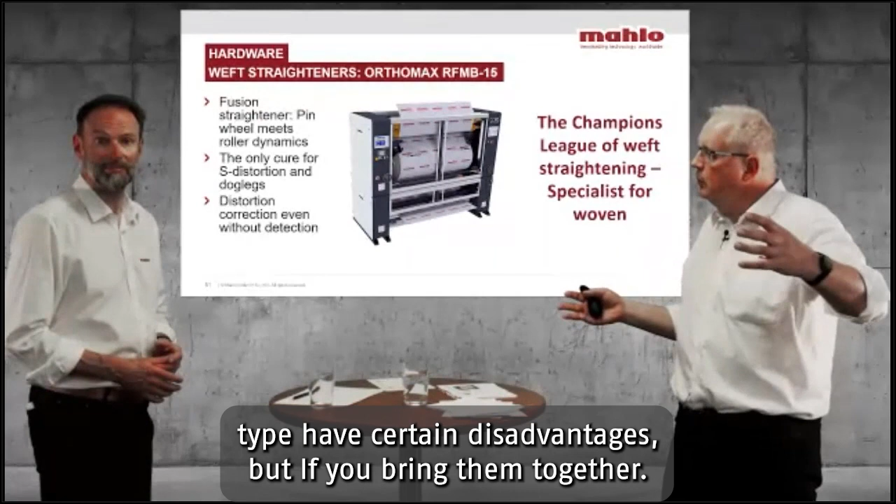Now we have another system, which we call our champion for woven fabric. As you can see here, this is a fusion of a pinwheel straightener with a roller type straightener. Both principles of correcting distortions—pinwheel and roller type—have certain disadvantages, but if you bring them together they only have advantages. It's the best of both worlds.

Because of time restrictions we cannot explain everything included here in Milan, but we have this machine on the booth—you can come see it in running condition. Please come by, and I think we'll be able to convince you. We are here as well.

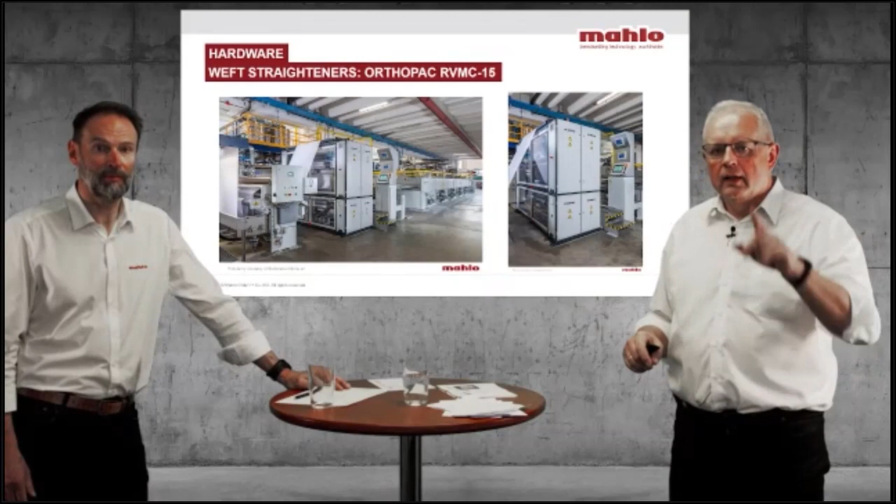Here you can see some installations. It's quite a huge machine for a Weft straightener, I have to say, but it also creates great results, especially on woven fabrics where you have irregular distortions that roller type straighteners struggle with, or distortions just at the edges. This machine, with the pinwheel and roller type straightener—a passive and an active machine together—can do the job.

And we have this not only on stenter frames—here you can see it now on a decatizing machine. This is a continuous decatizing machine at Sanco in Italy, and this is a KD decatizer also at Sanco.

When we talk about machines, we also have to talk about operating them, because a machine is only as good as the operator standing at it. Our operating concepts are very intuitive—we've spoken to a lot of operators and shared their knowledge and experience in our applications, so they normally like working with our machines. They see exactly what is happening, what's going on, and know exactly which button to press, so it's really fun to work with them.

For shift managers and production managers, they can see from far away what is happening at that machine—whether the fabric is straight and whether it's running in manual or automatic mode. All the information is visible at a glance, which gives a lot of advantages if you just pass by, because when an operator knows he can be watched at any time, he'll do everything right and won't wait until somebody corrects him.

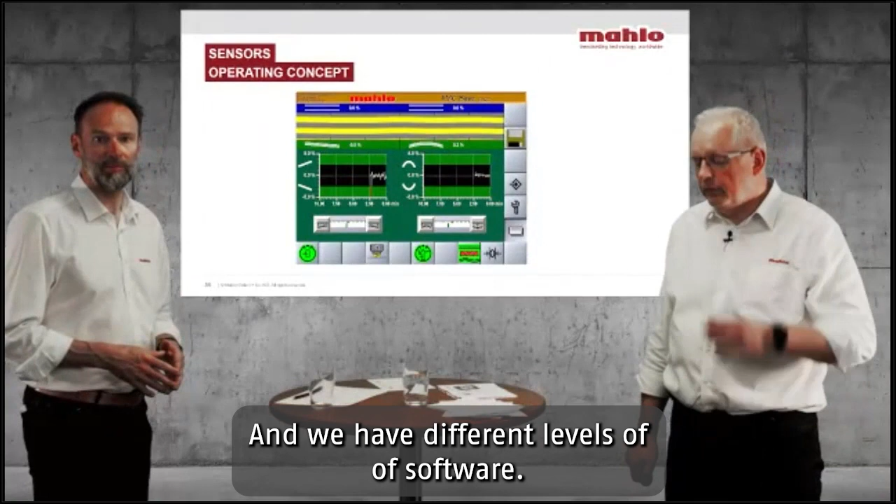We have different levels of software, which mainly differ in the level of comfort of operating the system. There is no compromise when it comes to the evaluation of the signals and the control itself, but you have different possibilities for how you can work and interact with the machine.

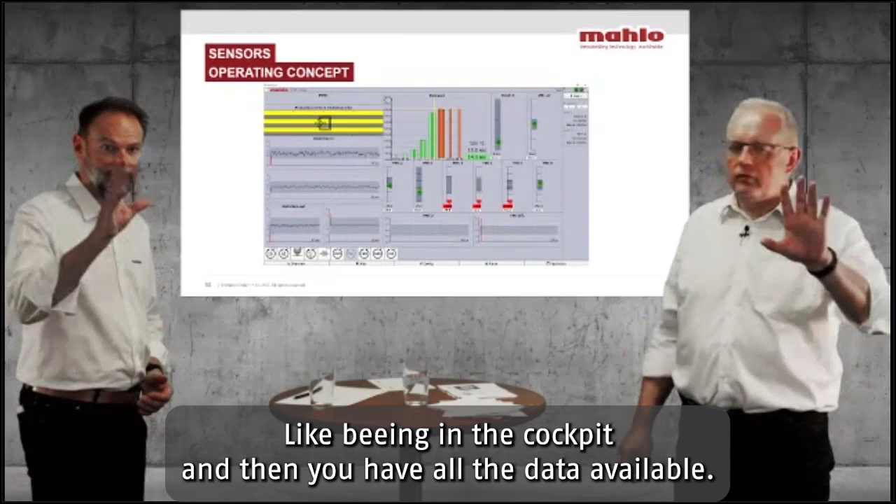You get a little bit more information, some help on how to set up the machine and such things. And on top, when we combine weft straightener with process control, we have a version where you can see everything on one screen. It's no longer necessary to jump from one page to another. You can see all the important parameters during a stentering process on one screen, in the Mahlo cockpit, and there you have all the data available.

Talking about data management, these days Internet of Things and Industry 4.0 are very important just to play with the data, to make it available, to create transparency, optimize processes, share data with other entities, perhaps also managing your dye house and your operation from another point, from a home office or wherever.

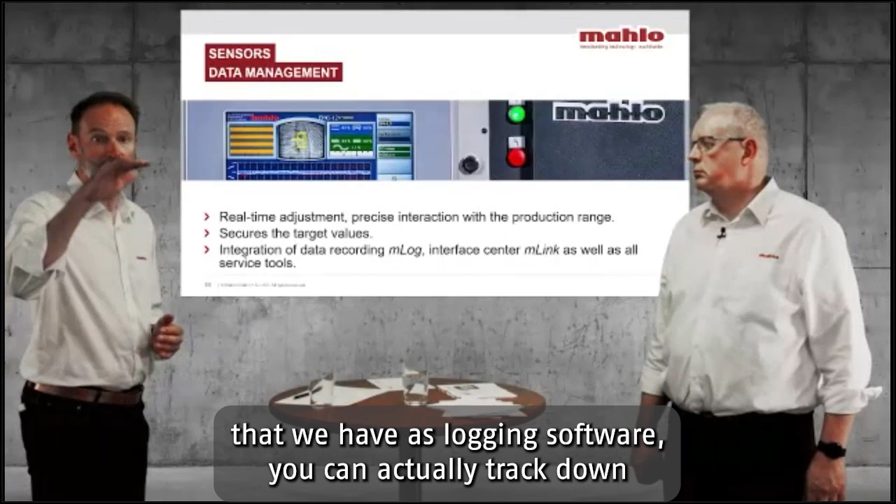Those are things we support in every aspect, with the right interfaces and adjustments, and with the mLog system that we have as logging software, where you can actually track down every centimeter of your fabric and see what has happened with it during the night shift, during the weekend. So you really have full transparency of what has happened, and you can share it with everybody who's interested. So if somebody blames you for not reaching the right values, you can show exactly what has happened. You have an insurance for everything that might happen in your production.

As far as the interface is concerned, we have Profibus, Modbus, TCP, OPC UA, everything. Just talk to us and we'll find out very soon. All the regular interfaces are there, so you just tell us what you require, and then we can provide the data externally.

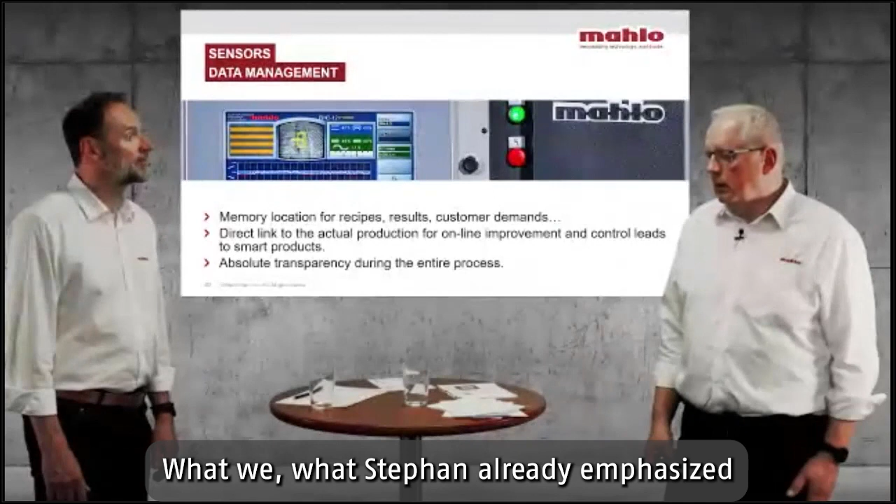What Stephan already emphasized is that we use the measured data for online control, like what we showed before, but we also give you historical data, now given in the form of protocols. We've developed a complete new software where it's like a search engine - the data is stored, and with this system you have the possibility to create your own protocol, however it's required from your side. You can say, I want to see the data from the full shift, or from one customer delivered within a specific week. You can do whatever you like because all the data is available, and it's got a very nice look and feel.

So then finally we have this cockpit, as we call it, where you have all the data together on one screen, where you can collect the data from different lines in one operation, where everything is really available for you.

The benefit of data management, I think everybody knows, is that you get great performance, and you can detect anything that goes wrong in your production. Transparency is the keyword here, and teleservice - I think we've done that for ages already, so this is standard - meanwhile, with everything required to get your production line running again if something goes wrong.

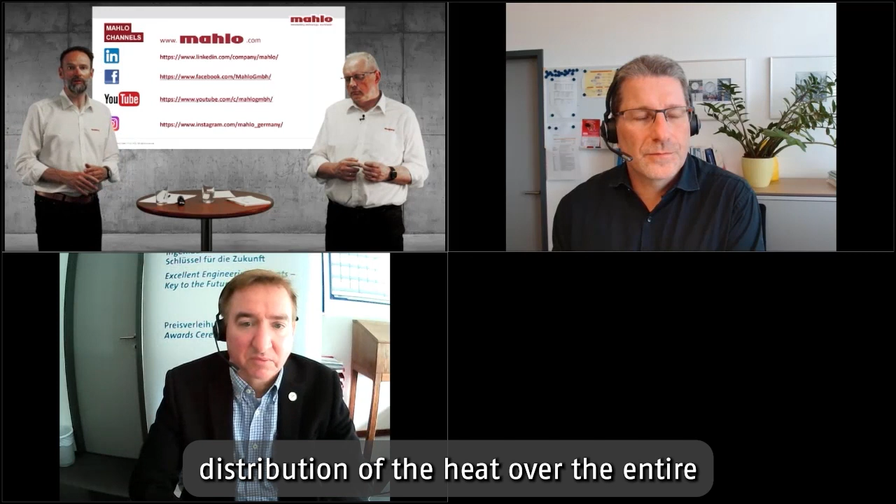In case of wider width stenters for bed linen with dwell time controller, how crucial is it to also consider pyrometers across the width in each chamber? Will it help the result? Yes, this is absolutely a valid question, and it's my fault that I haven't mentioned it earlier. Of course, this is a vital thing, to see whether the drying process is really taking place over the entire width. If we're talking about 3.2 meters, the distribution of heat over the entire width is not always regular, and with that we can check it, and you get a very good indication of what is happening inside your stenter. Then you will realize if there might be a problem before you have a fabric that is destroyed, something like that.

Yes, and the same applies to the residual moisture control. We not only have the possibility to measure the moisture content, the lowest moisture content, we can also indicate left, center, and right moisture content, which is again sometimes important for afterwards padding processes and such things. We have what's called the PEP system. Exactly. Okay.

Another question - this person seems to have some doubts. It seems to me difficult to control drying cylinders because of the masses involved. It is much more difficult than in a stenter. Does it really work? It works perfectly.

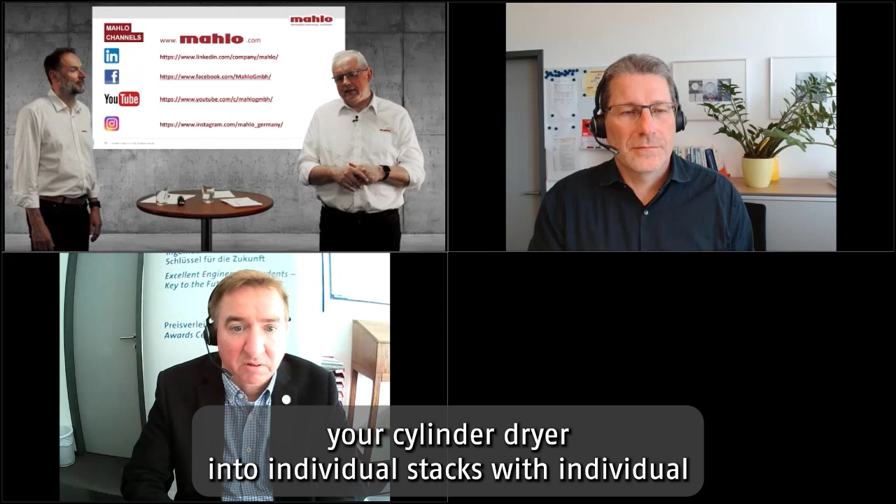I only can say we can give you reference installations. But also, one thing I have to mention: you cannot only have one valve at the end, which you control with the residual sensor. You need to do what I tried to explain with the condensate temperature, and you have not only one control loop. You need to separate your cylinder dryer into individual stacks with individual proportional or on-off valves. This is necessary. And then it works perfectly.

We have many customers, especially with the Atmoset SMT, who bought one or two systems and afterwards have 10 or more installed. I can fully understand why somebody thinks that might be a problem with these cylinder dryers, simply because the steel or stainless steel of those cylinders doesn't change temperature very quickly. This is why we have taken that surplus of the condensate, because the temperature of the water can be measured, and this is an indication.

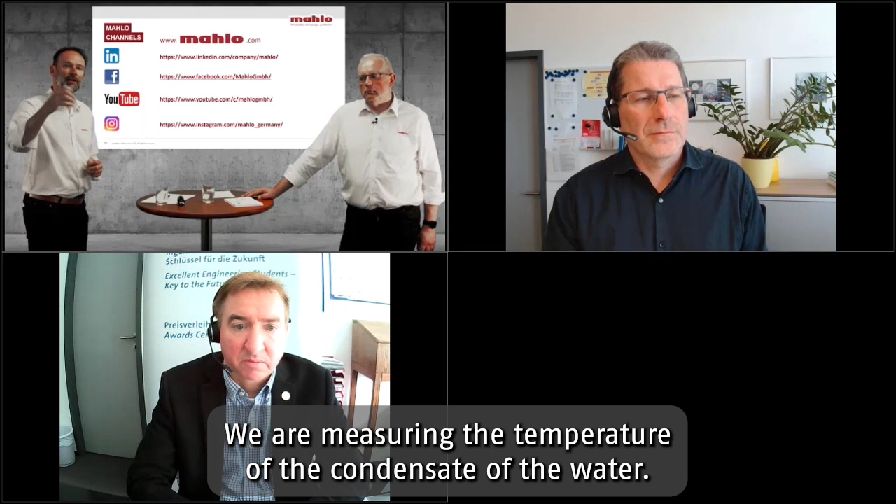This is actually the reason why our system works. It's because it's a Mahlo, of course, but also because we have taken that water, which fluctuates much easier in terms of temperature than the steel frame of those cylinders. So don't be misguided by that huge installation of cylinders which don't quickly change temperature. We are not measuring the temperature of the cylinders, we are measuring the temperature of the condensate of the water.

This is the reason why it works that easily and why we can control it. We wouldn't be able to control the temperature of the cylinder, or the chrome, or the stainless steel, or the steel—that would not work. But by measuring the temperature of the condensate pots, this is why it all of a sudden becomes a very, very good system.

Another question: Can you also recommend pick density counter to an open width compactor in felt type? Basically, we have quite a number of installations there too, because in the end it's the same inlet scenario as on the stenter frame. It's open width—you go underneath, you have the overfeed roller, and you overstretch before you go there to get those things in.

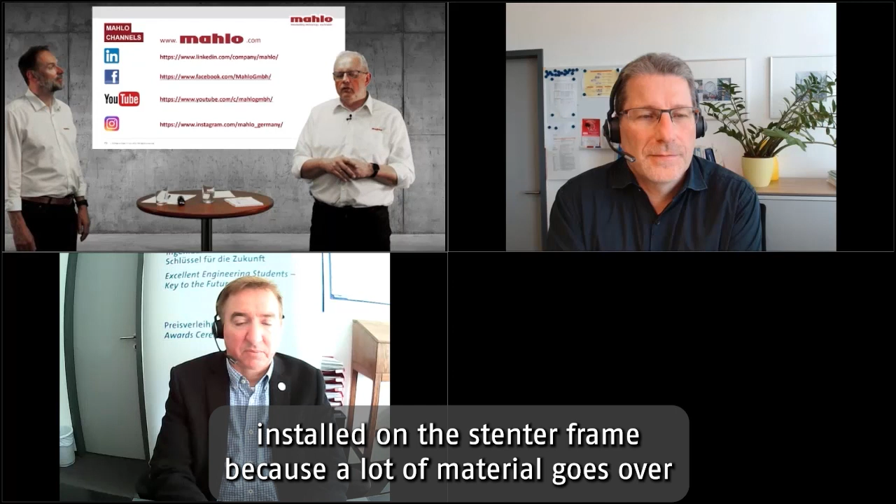Yes, it's possible. But I would say it should first be installed on the stenter frame, because a lot of material goes over the stenter frame. It can be equalized there already, and then it comes to the open width compacting machine already with a very equal density. Then you can utilize the open width compactor with better efficiency and also with higher speeds.

To finalize, I would like to quote a comment: 'Excellent presentation by both of you. I'm sure this session is the need of the hour. I think you've done an excellent job.' Thank you, thank you, it's a pleasure—means a lot to me, to us. Yes, I think there was a lot of commitment and conviction involved in your presentation, and I think you're really a good team to present all these innovations and advantages for the textile industry.

Perfect. So thank you, Boris. And now we wait for ITMA to do it in a live performance. Yes, I was also live now here. Sorry—it's always better to meet in person, of course, which is possible.